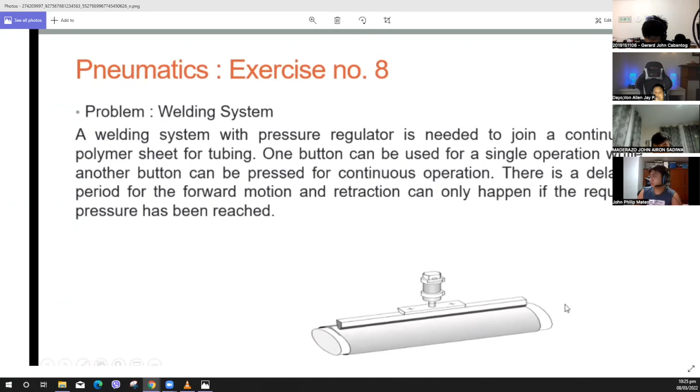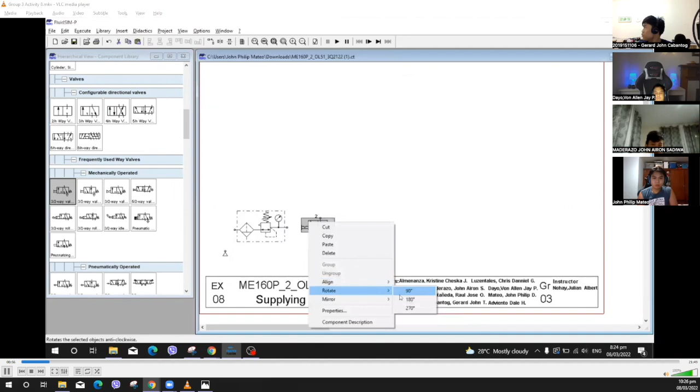Now we will put first the compressor and next the service unit. So next we will have the 3/2 way valve push button, and it will serve as the master switch of the whole simulation. It is the on and off switch of the other 3/2 way valve with push buttons for the double acting cylinder to move forward and to retract.

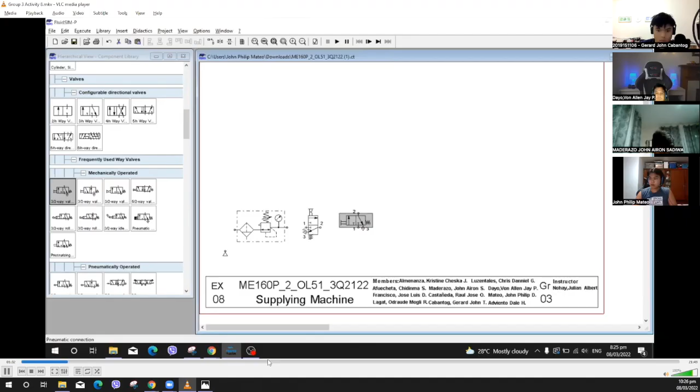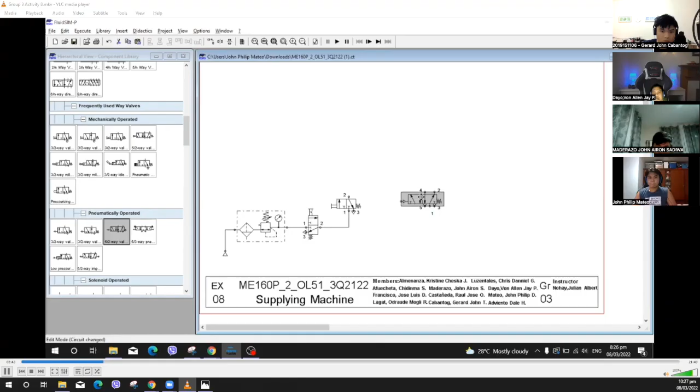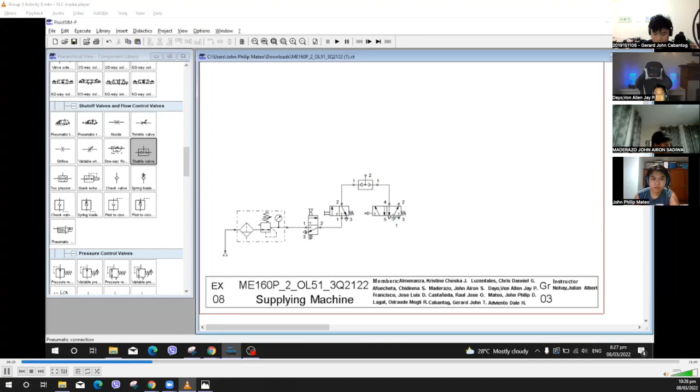Now drag and drop the shuttle valve in the top middle part of switch 1 and switch 2. Connect. Let's organize. Let's connect switch 1 to the shuttle valve and shuttle valve to switch 2. Then let's connect switch 2 to the main air service unit.

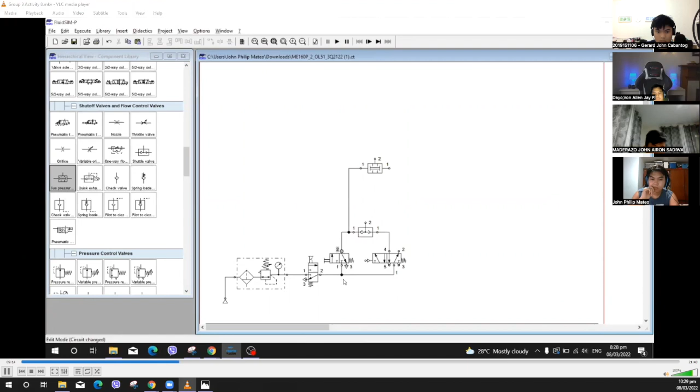After that, drag and drop the 2 pressure valve, and connect it with the SV. Now let's have the time delay valve normally closed, and then connect it with the 2 pressure valve, and then to the air service unit.

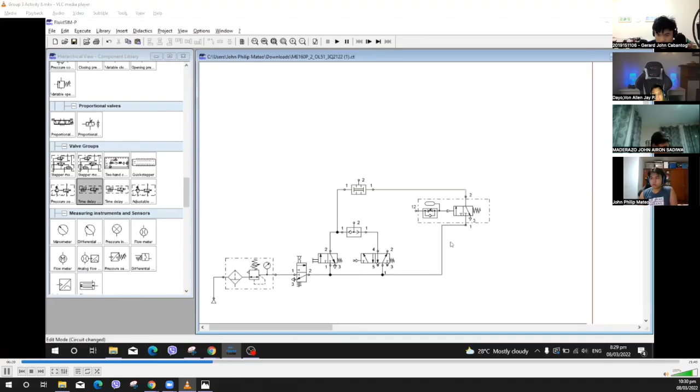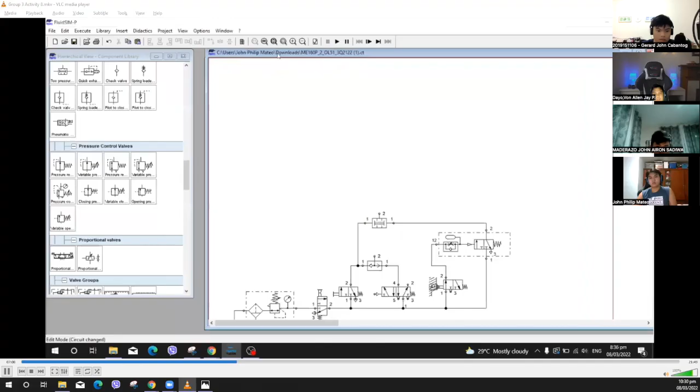Now let's have another switch, which we will name A1. Now let's organize so that there is more working space for the next parts. Now we will put the 5/2 way impulse valve, and we will connect it from the 2 pressure valve. Then we will put a pressure impulse valve and we will connect it from the 5/2-way impulse valve.

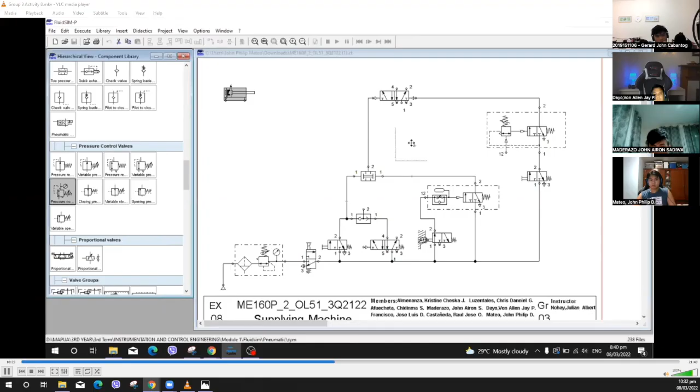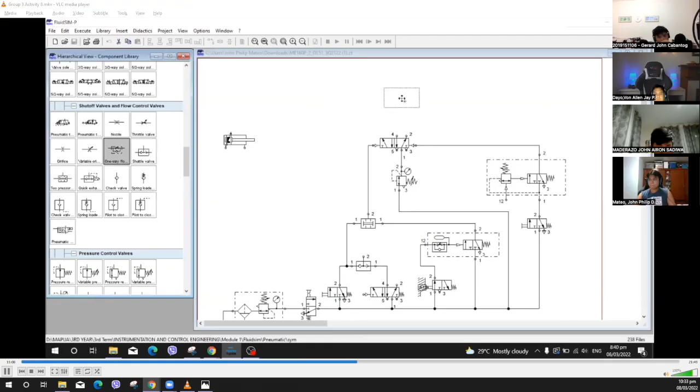And we will add the air service unit connecting from the pressure sequence valve and the main air service unit. We input pressure control with manometer and connect it to a 5/2-way impulse valve. Next, we place a one-way flow control valve above the impulse valve. We rotate it and use a value of 70.

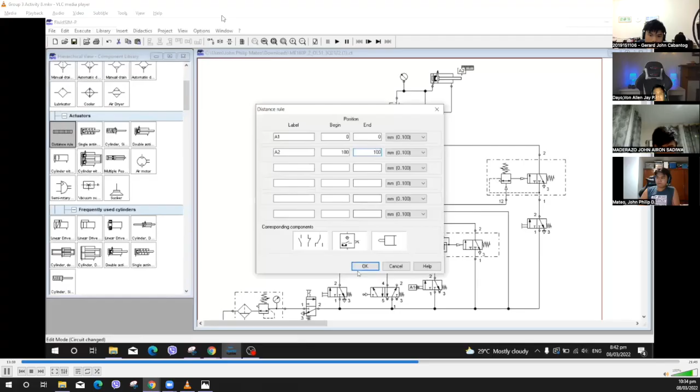We organize, and now we place a double acting cylinder. And lastly, a manometer. Then we connect the cylinder to the one-way valve and to the manometer. For the distance rule, for A2, we use a value of 100 and 100 for A2 and 0 for A1.

So next we will show the parts list, where we can see the different parts that have been used through the whole simulation. After that, it is labeled according to the appropriate acronym of the parts.

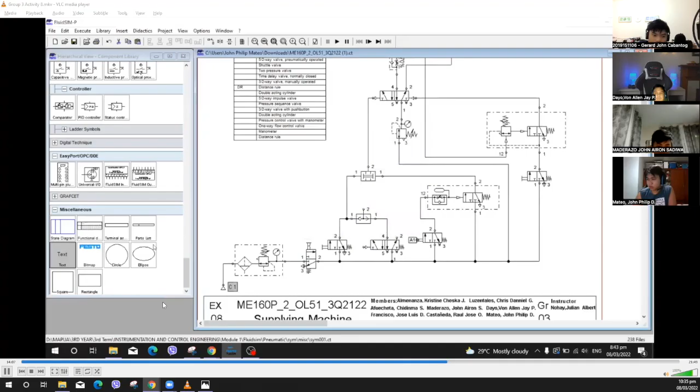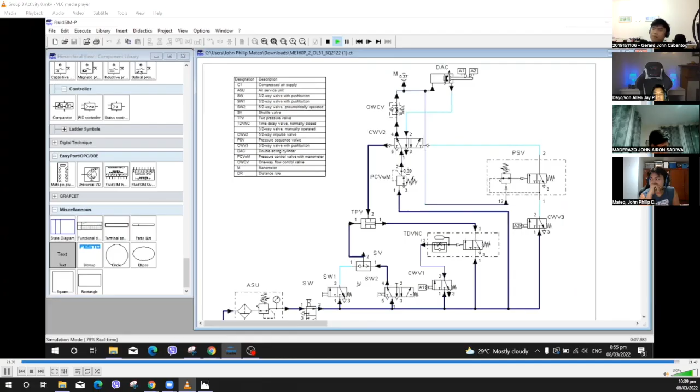Now we will try the simulation to see if this is working. For this simulation, we have two switches, which are a 3/2-way valve with push button and a 5/2-way valve with selection switch. The 3/2-way valve with push button is for 1 second only, while the 5/2-way valve with selection switch is a continuous loop which won't stop until it's turned off.